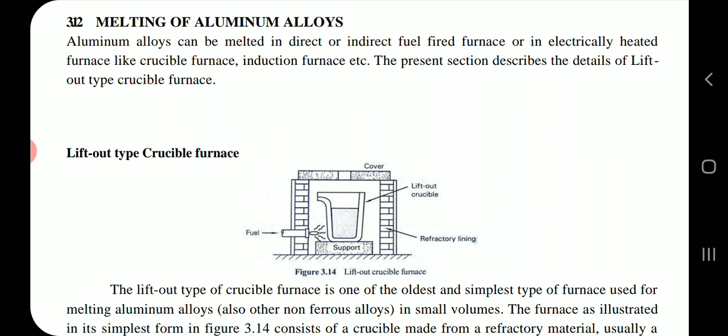Lift out type crucible furnace. The lift out type of crucible furnace is one of the oldest and simplest types of furnace used for melting aluminum alloys, and also other non-ferrous alloys in small volumes. The furnace, as illustrated in its simplest form in the figure, consists of a crucible made from a refractory material, usually a clay graphite mixture, or of a high temperature steel alloy.

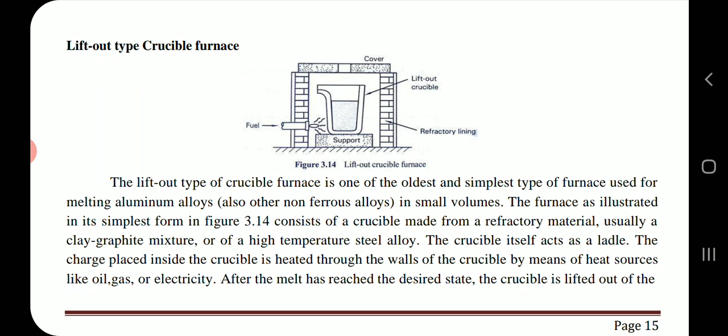The crucible itself acts as a ladle. The charge placed inside the crucible is heated through the walls of the crucible by means of heat sources like oil, gas, or electricity. After the melt has reached the desired state, the crucible is lifted out of the furnace with tongs and the molten metal is directly poured into the mold.

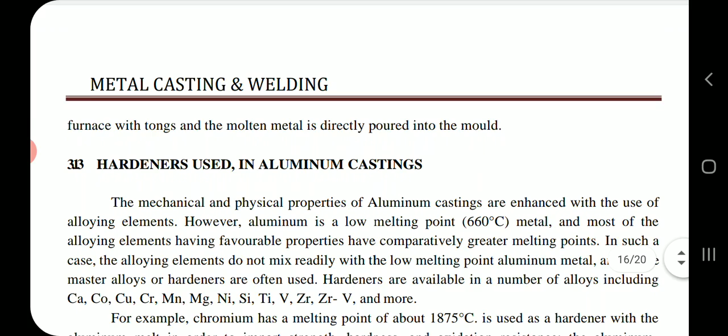Hardeners used in aluminum castings. The mechanical and physical properties of aluminum castings are enhanced with the use of alloying elements. However, aluminum is a low melting point (660 degrees Celsius) metal, and most of the alloying elements having favorable properties have comparatively greater melting points. In such a case, the alloying elements do not mix readily with the low melting point aluminum metal, and hence master alloys or hardeners are often used.

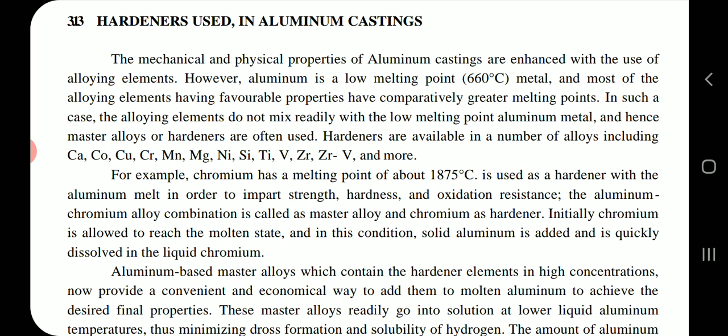Hardeners are available in a number of alloys including calcium, cobalt, copper, chromium, manganese, magnesium, nickel, silicon, titanium, vanadium, and more. For example, chromium, which has a melting point of about 1875 degrees Celsius, is used as a hardener with the aluminum melt in order to impart strength, hardness, and oxidation resistance. The aluminum chromium alloy combination is called the master alloy and chromium the hardener.

Initially, chromium is allowed to reach the molten state, and in this condition solid aluminum is added and is quickly dissolved in the liquid chromium. Aluminum based master alloys, which contain the hardener elements in high concentrations, now provide a convenient and economical way to add them to molten aluminum to achieve the desired final properties.

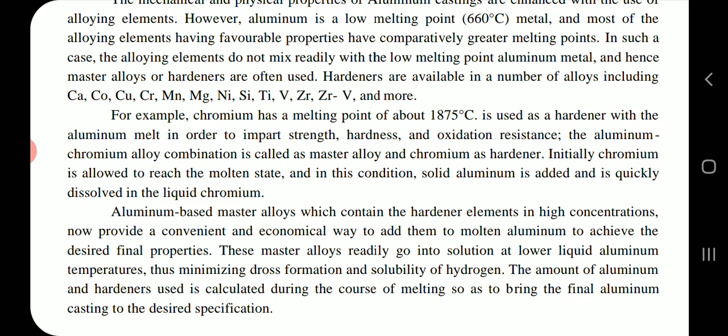These master alloys readily go into solution at lower liquid aluminum temperatures, thus minimizing dross formation and solubility of hydrogen. The amount of aluminum and hardener used is calculated during the course of melting so as to bring the final aluminum casting to the desired specification.

Drossing. Dross is a mass of solid impurities floating on the surface of low melting point metals such as aluminum, tin, lead, zinc, etc. as a result of oxidation of the molten metal. With reference to aluminum castings, the term drossing is specially used to denote the formation of aluminum oxide and other oxides that collect on the surface of the molten aluminum metal when coming in contact with air.

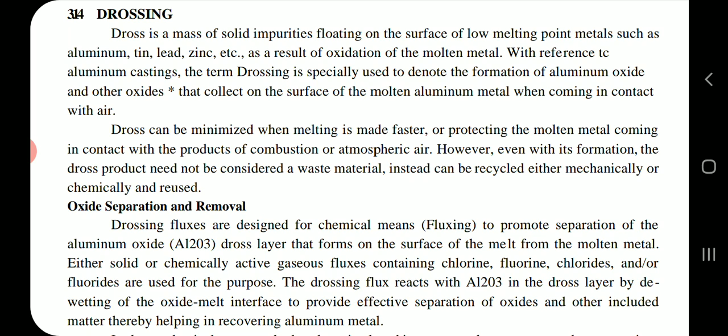Dross can be minimized when melting is made faster or by protecting the molten metal from coming in contact with the products of combustion or atmospheric air. However, even with its formation, the dross product need not be considered a waste material; instead it can be recycled either mechanically or chemically and reused.

Oxide separation and removal. Drossing fluxes are designed for chemical fluxing to promote separation of the aluminum oxide Al2O3 dross layer that forms on the surface of the melt from the molten metal. Either solid or chemically active gaseous fluxes containing chlorine, fluorine, chlorides, and/or fluorides are used for the purpose.

The drossing flux reacts with aluminum oxide Al2O3 in the dross layer by de-wetting of the oxide melt interface to provide effective separation of oxides and other included matter, thereby helping in recovering aluminum metal.

In the mechanical process, the hot dross is placed into a press that squeezes and separates it into aluminum metal rich particles and aluminum oxide rich particles based on density. The metal rich particles are then melted in a furnace to remove the remaining oxide particles.